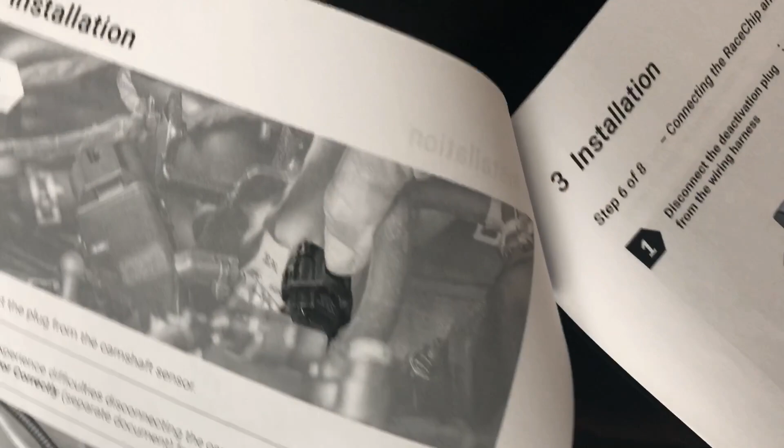Shows you how to disconnect it, or how to tee off. Again, shows you where the rear map sensor is on the manifold, and this one is for the rear sensor, the camshaft sensor.

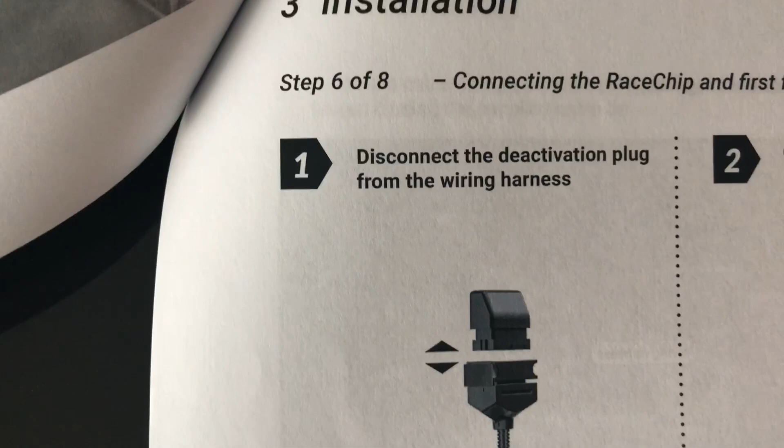So I guess that's called a deactivation plug on the wiring harness. I'm sure it probably does something, but yeah, that goes there, connected to the RaceChip.

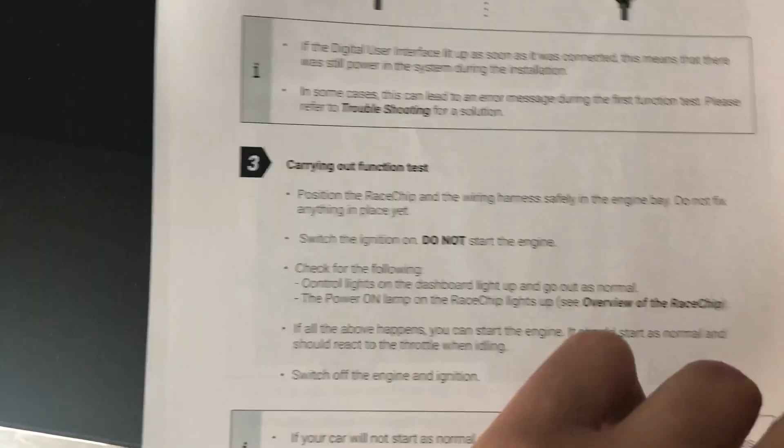As I mentioned before, this shows you how to use those little clips and zip ties to secure the RaceChip somewhere. On these pictures, you just have it over there on top of the fuse panel box, which actually looks pretty clean there, and the wires pass through that little foam piece that's easily removable.

Fine tuning, that's the nice thing about the RaceChip - it does have a fine tuning function. Once you set it up exactly the way you want it to run, those little plus and minus symbols, you use those to just edge a little bit more power out of it.

There's instructions, I've read it already, it shows you how to do it. Just troubleshooting here - there's more in this one, more in this one. Some of this stuff is generic, includes a lot of the information that's in this one. But again, RaceChip provides everything so you have a full process on how to install everything.

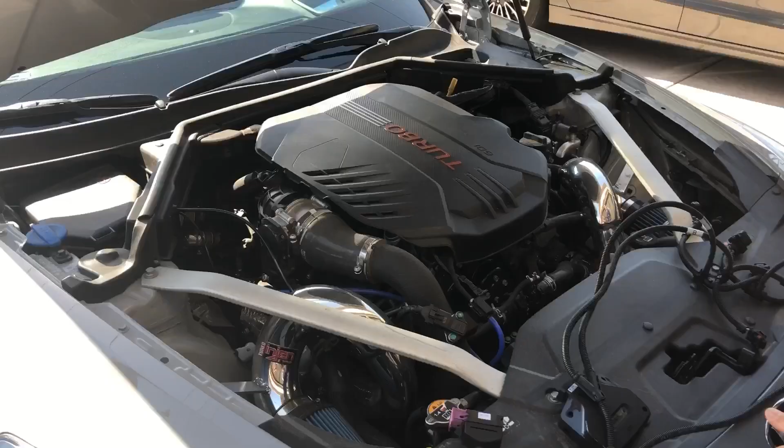All right, so now I'll go plug it in. About to install the RaceChip. First thing you have to do is remove the engine cover - pops off just like that. Like I said, there's a couple different plugs that go to this.

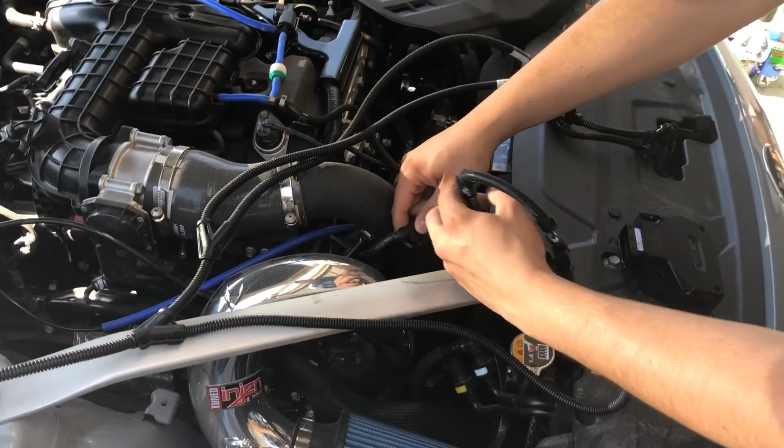Okay, so the one that separates here, which is plug A, that's the one that goes to the map sensor on the charge pipe. And just like with the other chips, that plugs into there. This plugs into here, and that's pretty much it for that part of it.

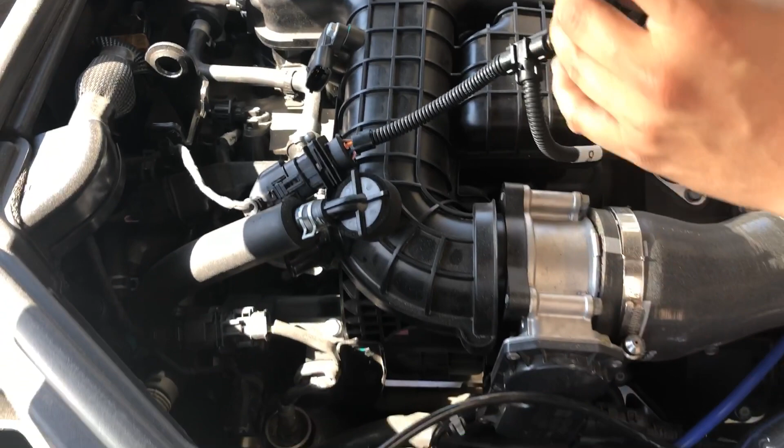Then there's these two other ones. B goes into the map sensor that's located in the back of the intake manifold, which is back here. So same thing, just unplug that one, plug it into that there, and then plug this one here as well. And that's it for plug B.

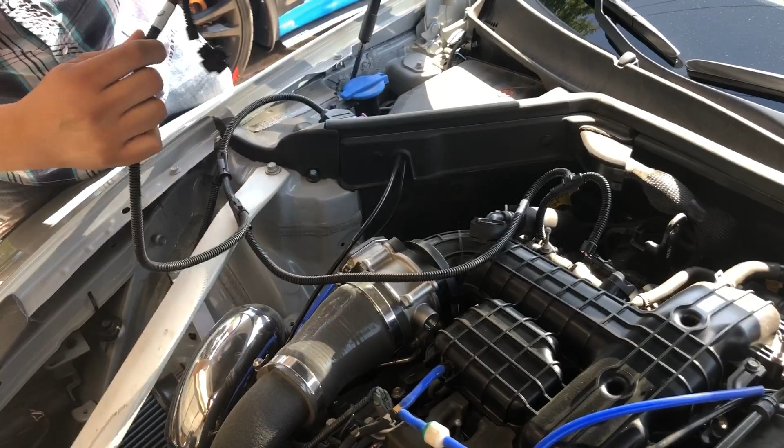Cool, so the third one, this is plug C. That goes to the cam sensor, which is back here. Kind of hard to see, but that unplugs there, and... just like with the other ones.

Probably shouldn't do it with a warm engine bay. That goes there, and this one goes into here as well.

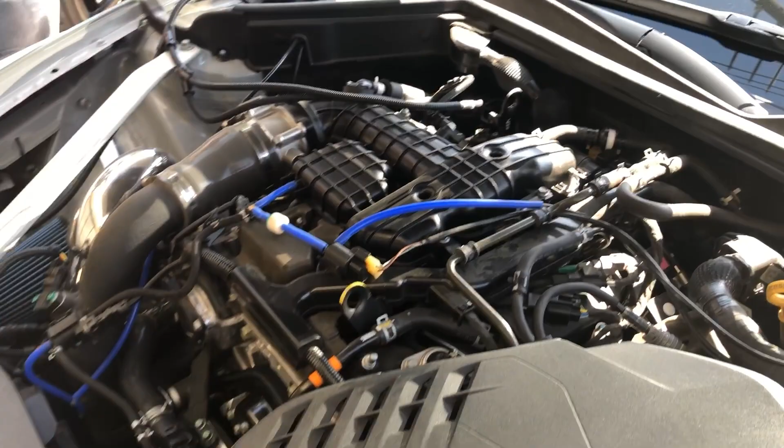There we go, so that's it, RaceChip is plugged in. In theory, all that's left to do is to grab this part, plug it into the harness, like so, and then this slides in.

And then this - okay, so once that's all the way out, that goes in, that slides in, locks into place, and you're set. All right.

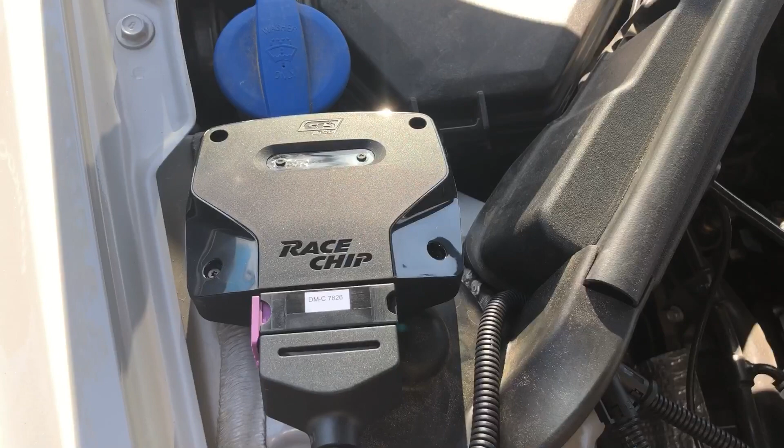So now, before you actually turn on the engine, you have to make sure that the chip is functioning properly, and turn on the ignition. So I'm going to turn that on, and it should turn on a little digital display there on the RaceChip itself.

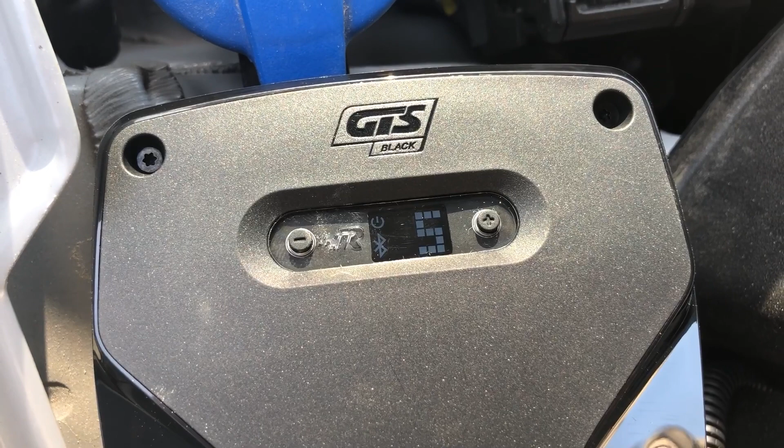All right, so now that that's on, turn everything off, and replace the engine cover.